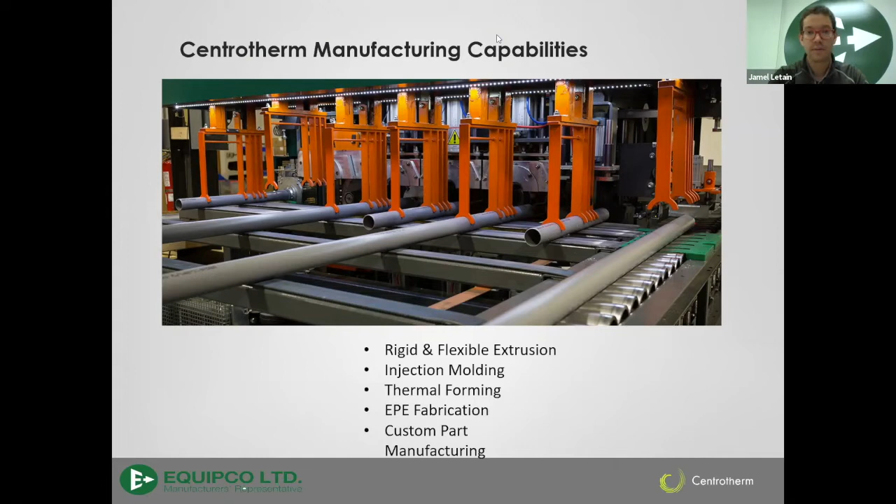So for the ULC-S636 standards, a lot of you are probably fairly familiar with this code. The class 1 is going to be for gas fired appliances that are more than 135 degrees Celsius. Your class 2 is going to be for temperatures of 135 Celsius or less. But you'll notice when you get into the class 2 that there's a few different classifications: the A, B, and the C. So for A, the maximum temperature is at 140. That's your typical PVC.

And then for your CPVC, you're going to be able to go up to 180 degrees Fahrenheit. And class 2C is polypropylene, and that's what Centrotherm is focused on, which is going to allow you to do any venting up to 230 degrees. So a lot of the CPVC business can get transferred over to polypropylene. Product's going to be lighter and more cost effective. And as you can see from the classes here, you're getting quite a bit more margin of safety in terms of the temperature.

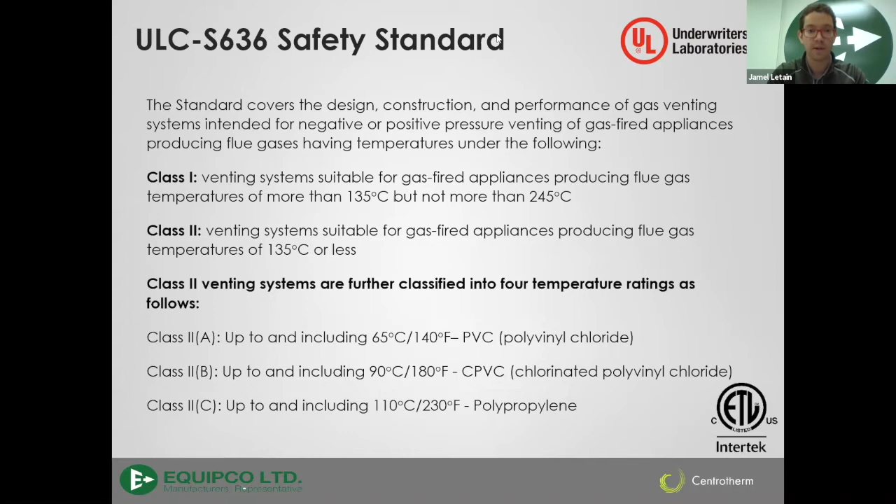So here, just a little bit more details on the ULC-S636 factors. For our InnoFlue, it's 0 clearance to combustibles, so you can attach that directly to your appliance. Some appliances you'll be able to connect direct, some you'll have to have an adapter. For your support requirements, deflection is not to exceed 1%. Vent systems must withstand 9 kilograms of impact, a 9 kilogram sandbag hitting the side of it. Is it going to be able to hold up its integrity? In terms of spacing, every 78 inches on a vertical run and every 39 inches on a horizontal installation.

It's got your flammability in terms of being resistant to flame spread. For your cold weather impact, it's also going to be able to handle minus 40 degrees Celsius. And then joint requirements is going to have the 100-pound pull test. Your connector rings are going to be required on your 2, 3, and 4 inch. These are your connector rings here. From the side, some of you might have a hard time seeing this, but there's this single tab here that'll end up linking over.

So for 2, 3, and 4 inch, you're going to need that on every single connection. On your commercial sizes that are 6 inch and above, 6 to 12 inch, it's not required, but they are available if you do want to provide that for the installation. And then for aging, you have a 180-day UV climate chamber. The InnoFlue Gray is UV certified.

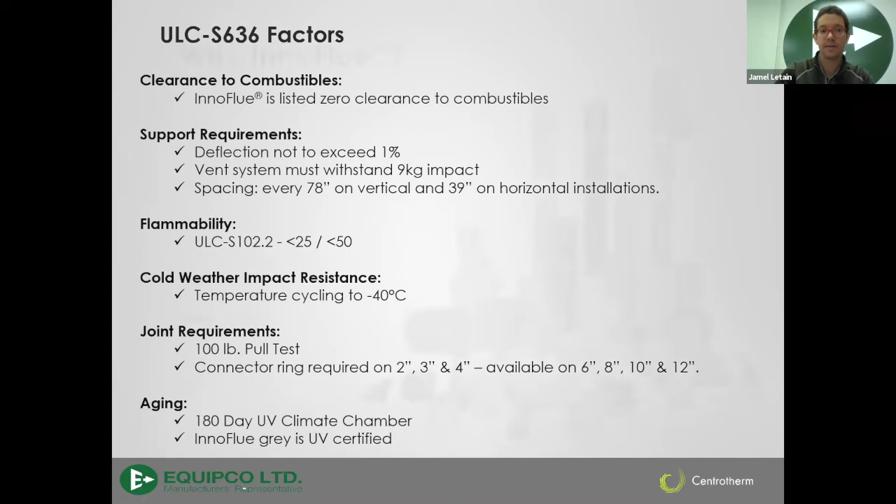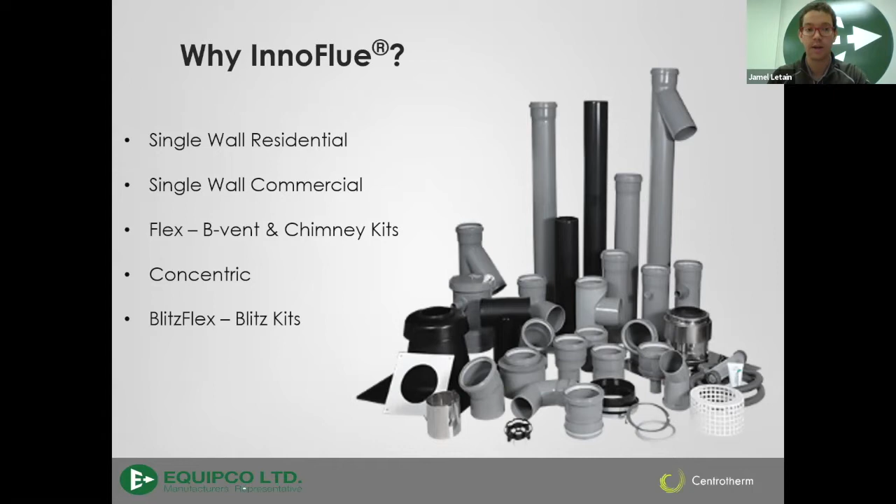So for why InnoFlue, we've got our single wall residential, we've got single wall commercial as well. And then there's also some flex B-vent and chimney kit solutions that you can use. And then they have concentric, and then we can get into the BlitzFlex as well, and Blitz kits. So first with the single wall vents, for residential there's going to be the 2, 3, and 4, and then commercial is going to be your 6 to 12 inch diameter.

And then for your section lengths, you have 1 foot lengths, 2 foot lengths, 3 foot lengths, 6 foot lengths, and then the 10-foot sections, which is really important to know with Centrotherm, because in terms of gasketed systems, it's pretty rare to come across a gasketed system that's going to allow you to have a 10-foot length. With the North American facility that Centrotherm has, that allows them to be able to provide that service to the North American market. I'm sure you can imagine how clunky it would be to travel 10-foot lengths from Europe.

And then as well, you can also cut and deburr. So if you do have a length that needs to be slightly shorter, the cut doesn't need to be as exact as it would be if you were using CPVC. You still want to keep it as flush and plumb as possible. And then most importantly, with the gasketed systems, you do need to make sure that you're removing those burrs in the field, because if any particles of the polypropylene end up getting inside of the gasket, that's going to compromise your system. That's your EPDM gasket.

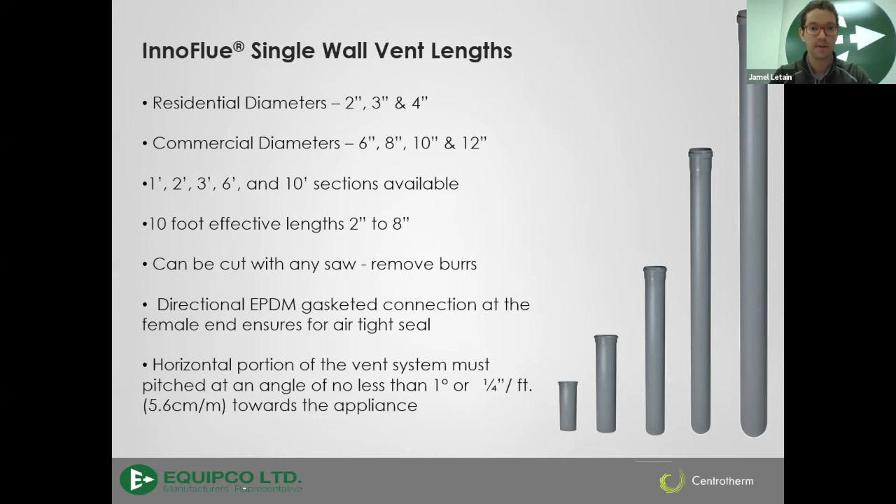Then for your horizontal portion, the pitch needs to be at an angle of no less than 1 degree or 1/4 inch per foot. Luckily, we've got some fittings to help you guys accomplish that as well. And that's what we're going to be going into here. So with our elbows, we don't actually have a 90-degree elbow. You won't be able to tell from this, but this is actually an 87-degree, meaning that the pitch is already naturally built in, which is great for the contractors in the field. Saves them a little bit of work.

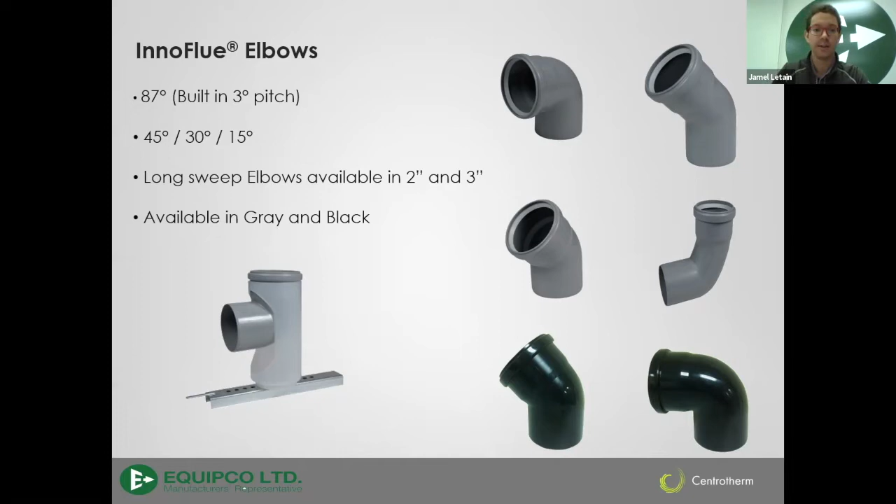And then we have 45s, 30s, and 15s as well. There's going to be long sweep elbows that are available for your 2 and 3 inch, and then available in gray and black as well. For condensate and combustion, these are a few different product options you have. The test ports are available, test caps with a drain, horizontal drain tees. We have the ball valve siphons.

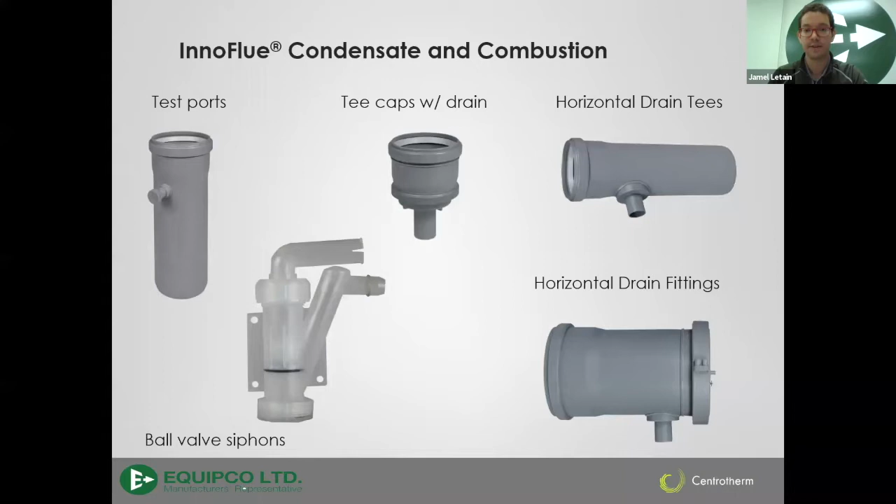If you don't have any rubber protecting the metal from the polypropylene, the chafing that could happen over time from expansion and contraction could cause your system to be compromised. So you just want to make sure that you're using a clamp that's going to have rubber. And in addition, it also needs to be a full clamp. You don't want to be using any U-clamps or whatnot. You want to make sure it's a completely closed setup.

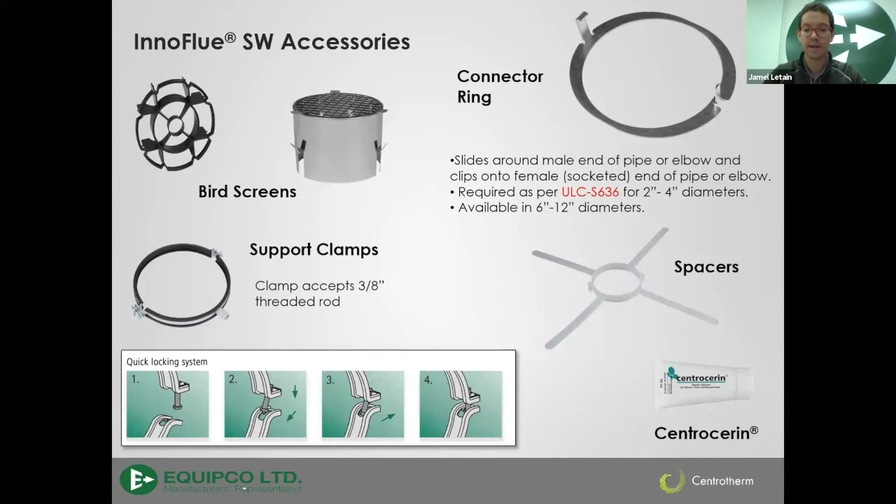And in addition, if you do need to do any adjustments before the final finishing work on the building is done, you can always spray the joints. The water will seep into the dried lubricant, and it'll reactivate and give you a little bit of playability to reset it. And then in about an hour to 2 hours, once it starts to dry out, you'll find that it's very secure again and you won't be able to move it.

Which is also a solution that you can offer as well. But in terms of trying to offer something to maybe some houses that are a little bit more luxurious, it doesn't really look too nice to have a gooseneck system. This low profile system complements the house a lot better.

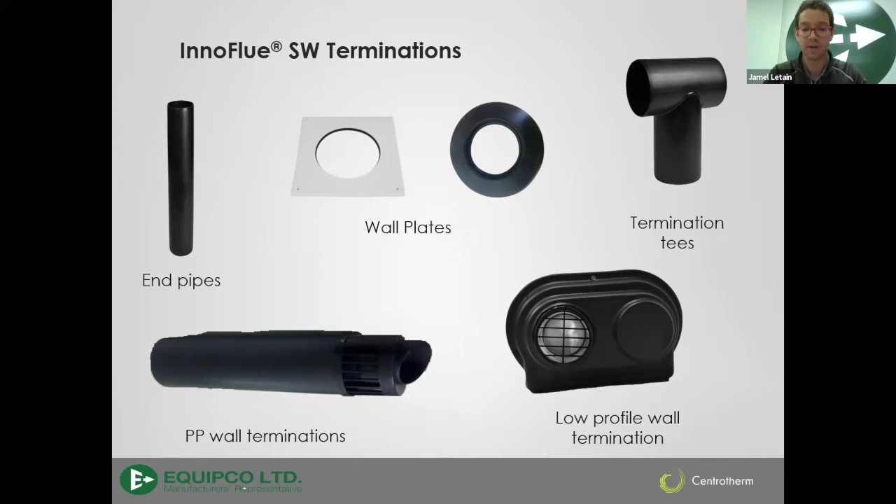In addition, you can also paint that black surface so that way it matches up closer to the aesthetics of the house. We get some positive feedback from developers from that, as the homes that they're building look a little bit more clean and a little bit more polished when you don't have as much mechanical components that are sticking out the side.

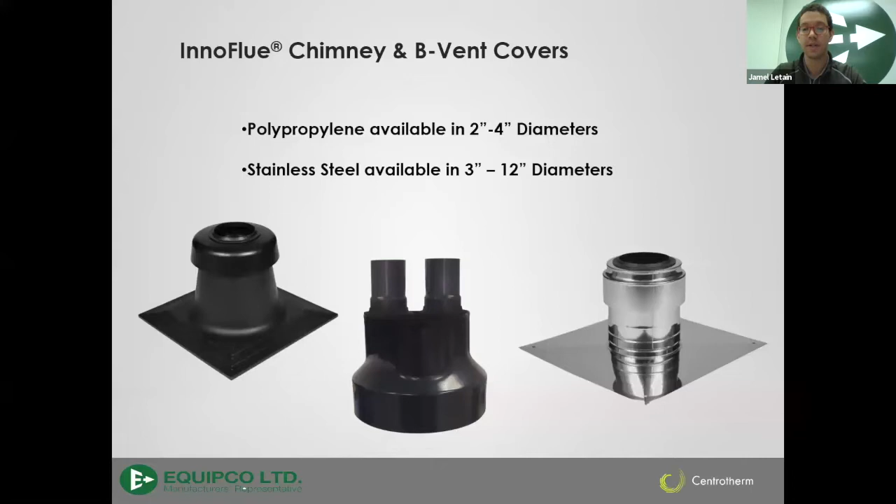So for the chimney and the B vent covers, you'll see the polypropylene is available in the 2 to 4 inch diameters, and then in 3 inch to 12 inch, there's going to be the steel or stainless steel available for you as well.

So for assembly, we'll go through one here quickly just to give you an idea of how this works. So here I just have one of the standard InnoFlue systems. You'll be able to recognize from the green here that this is the standard. So this is what you're going to use for your flue gas going up to 230. You wouldn't use this for your air intake. It's going to be the Blitz that you'll use for that. So to recognize that, this is going to be your green labeled.

Then you're going to take one of these clamps here. Then we'll also have an 87-degree elbow. I'm going to take the Centrocerin, take a small dab of it. Doesn't have to be very much. I'm just going to lightly place a layer all the way around. It doesn't have to be too much, just enough to make it glossy.

If you do apply a considerable amount of this Centrocerin, you will find after installation that there's some flakiness on the edge of the pipe, just from the excessive amount that was used. That's not an issue. The system will still work just fine. It's just that if you do have any inspectors that are on site and they notice that, they might be questioning why that residue is there. So just a good thing to keep that in mind so that you can let them know that it's likely just a little bit too much of the Centrocerin that was used.

So now that we have that lightly lubricated, we take this piece, take this piece over top like this, pull that down, place this over top, slides in fairly easily, and then you just want to take that clamp on the side and you're just going to pop it over the top. You'll have to excuse me, it's going to take me a moment here.

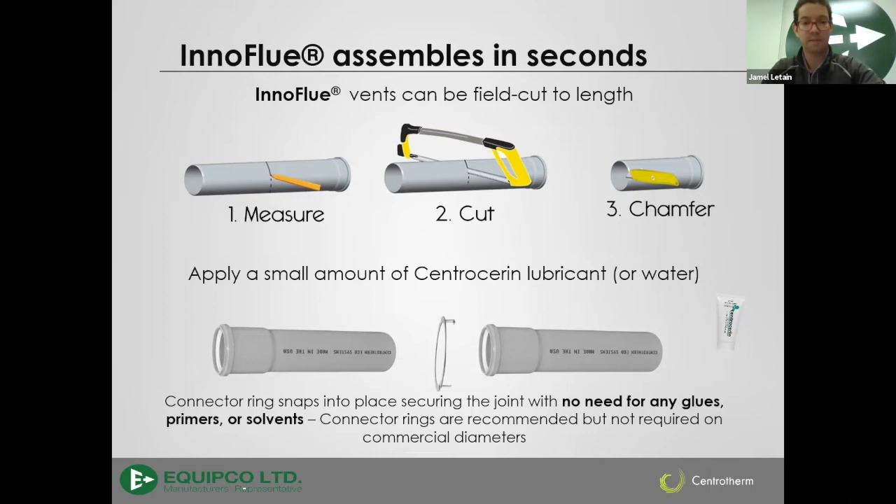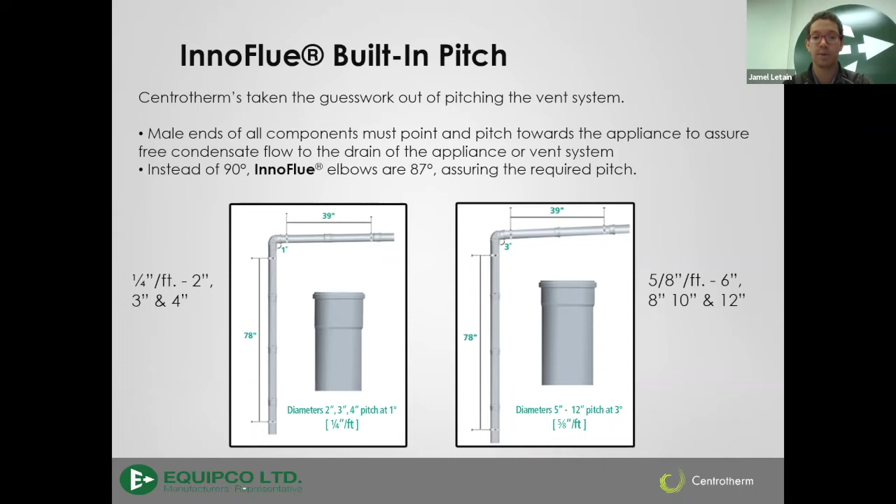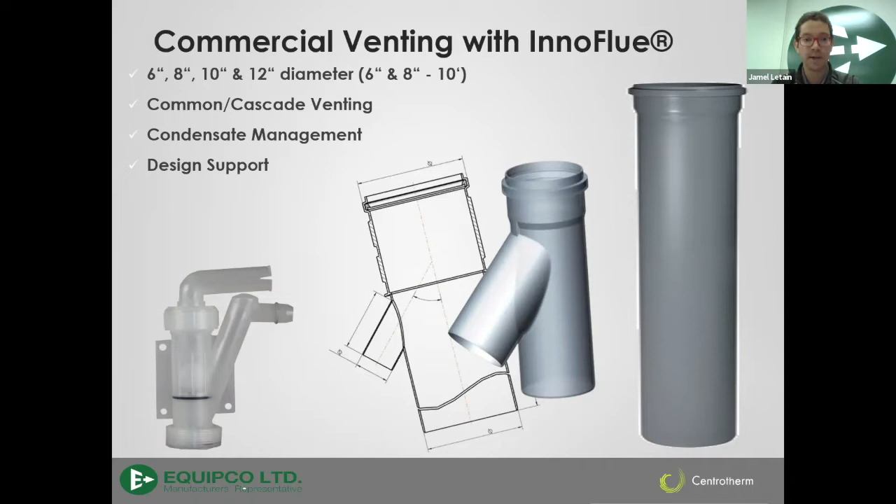For your commercial venting, that's going to be your 6-inch to your 12-inch. You can do common and cascaded venting as well, condensate management, and then there's a design support. Towards the end here, I'll provide you guys with a little bit more information on that design support, as it's a very innovative service that Centrotherm provides, and I really think it's something that people in the market should really be taking advantage of. Not only does it give you guys some backing from the customer, but it's also just a very professional document that's going to help people out.

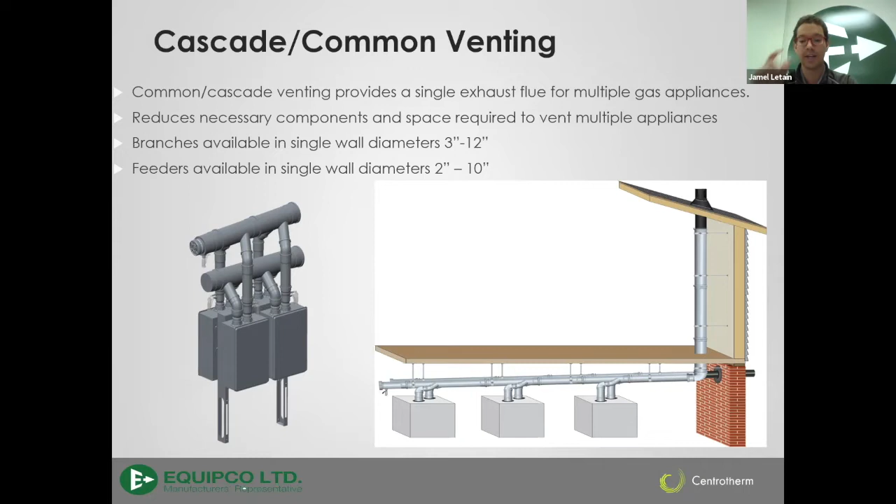Here's a nice sample or a picture here for you. You can see the siphon system on the top and them being cascaded together. Also can notice the clamps and supports that are used as well. And you can see that both of the vents are attached right to the appliance as well.

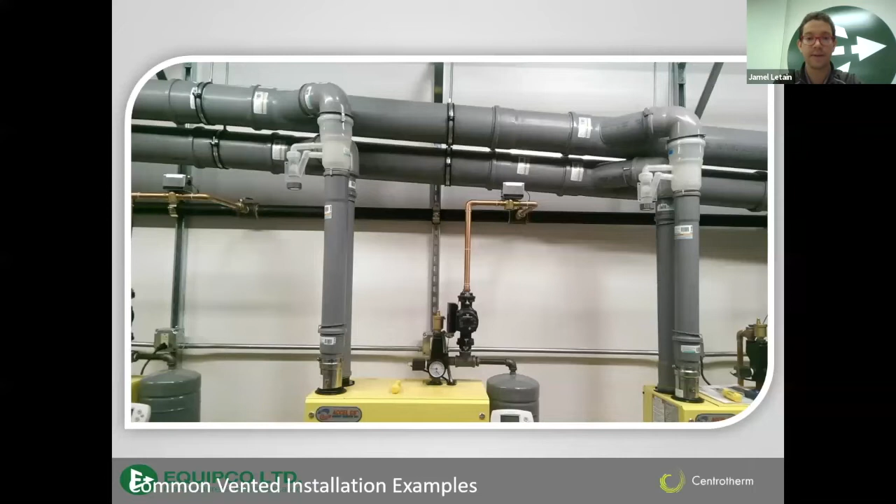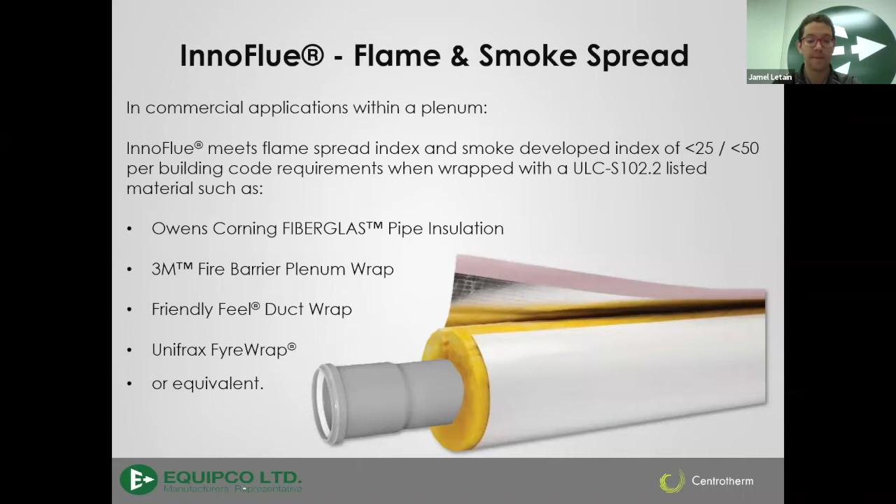So InnoFlue for flame and smoke spread in commercial applications within a plenum. InnoFlue meets flame spread index and flame development or smoke development index of less than 25 or less than 50, per building code requirements, when wrapped with a ULC S102.2 listed material, such as a few different options you have available below. And for barriers or fire barriers, single wall polypropylene vent systems can be used in areas that require 1 or 2 hour fire ratings, ULC S115, when used with a listed passive fire protection system.

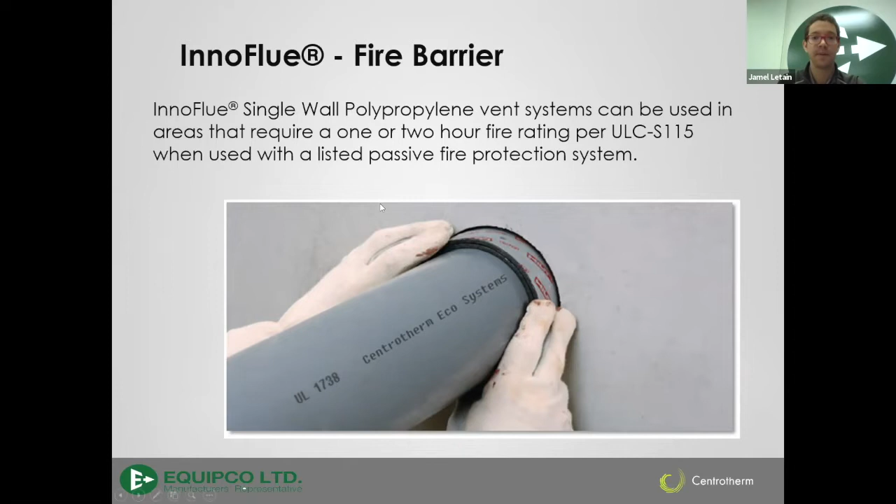Here for the InnoFlue Flex. The Flex can be offset up to 45 degrees. You can see it's a corrugated system, so you can't have it horizontal as opposed to the solid wall system that can run horizontally. This Flex is available in 2-inch, 3-inch, and 4-inch diameters. The 3 and 4-inch Flex will come with an integrated coupler, must be installed in a vertical chase, and easily connects to any fitting or vent length. It's specifically engineered for efficient installation within masonry chimneys, B-vent, and gypsum chase.

With this product, the other thing to keep in mind is installation time. Not only does InnoFlue and the entire product line save you time, but I've been given some really good feedback from a contractor here in Edmonton that speaks highly of this InnoFlue Flex. He and one other employee are capable of doing an entire venting project in a fairly short period of time. He's actually able to rent out a boom and still keep his costs lower than some of his competitors. So it's definitely worthwhile for you guys to take this InnoFlue Flex into consideration for some of your projects moving forward.

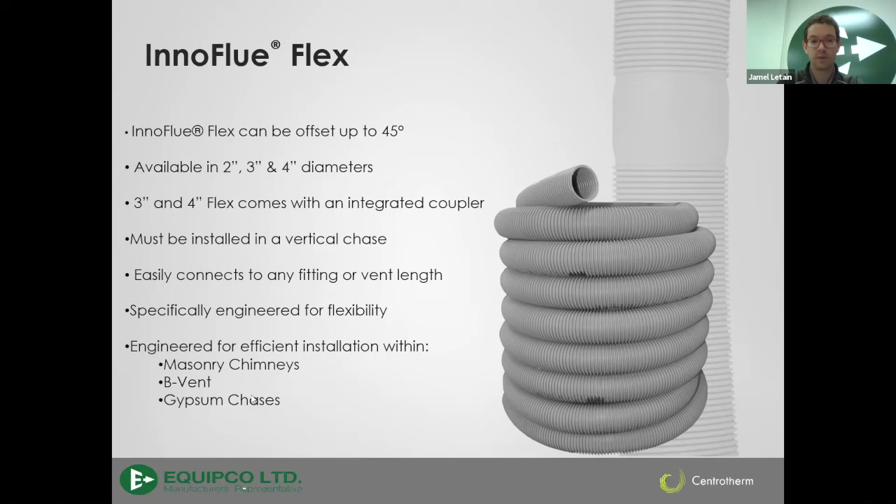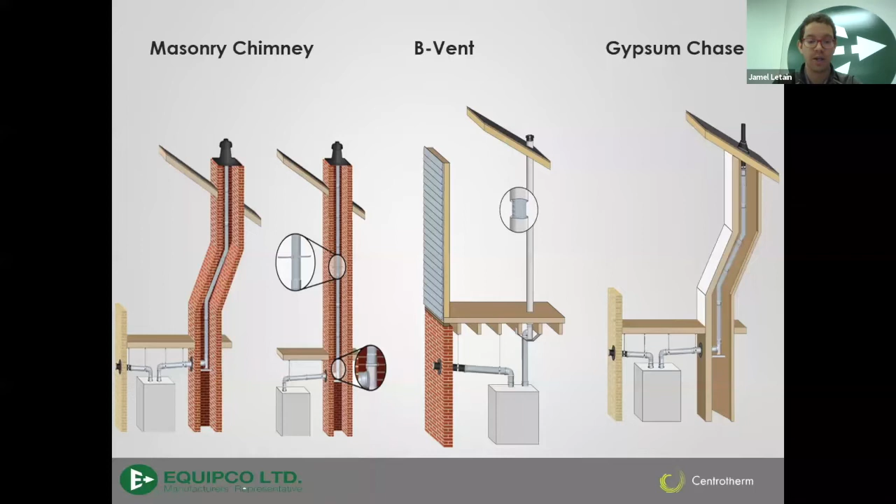Here's a few different samples or examples of the masonry chimney. You can also see the B-vent and the gypsum chase, as well as some closer views of some of the important connection points.

For the InnoFlue Flex components, they're engineered to facilitate quick and easy installation. You can see a couple of the accessory components here used to help. For the vertical run, there's the base support, that's the picture right in the dead center. It's one of the items we find is very important to make sure you use. It's very simple - you give it your horizontal line, it has an access, and you run up on your vertical line. Then there's just a 3/8 connector here, so you can use your base support, as opposed to trying to come up with a system on your own and trying to mount it. This is going to save you guys a lot of headache.

The support bracket on the bottom right, similar concept as well. Here's an example of one here. It's just got that 3/8 hole. It's going to save you guys a lot of effort. You can use either side there to screw it into whatever studs and mounting you might have in position.

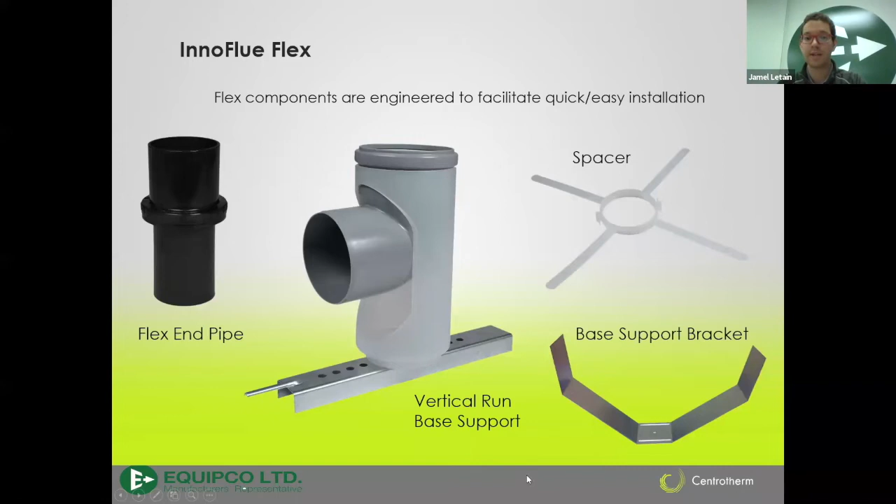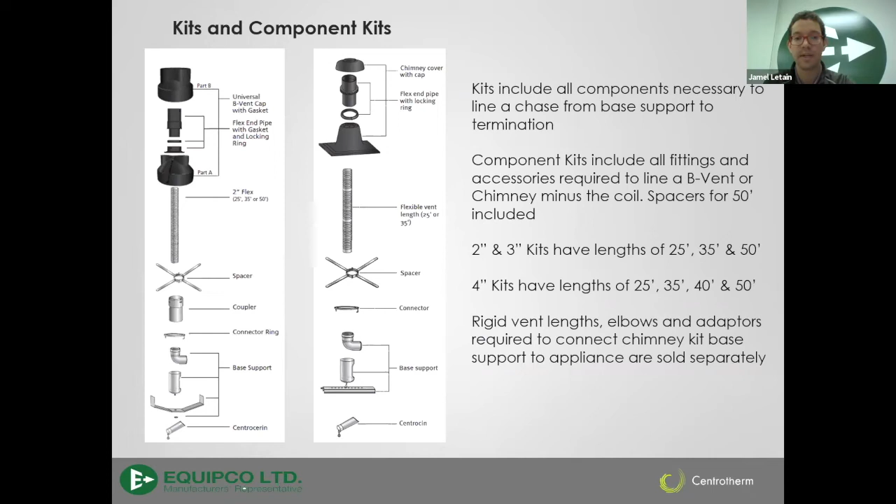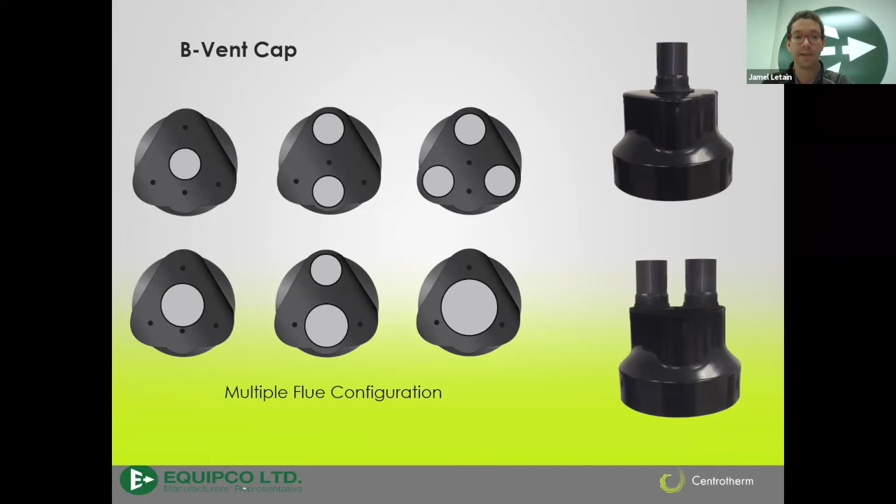So for these B-vent caps, this is a pretty interesting innovation that Centrotherm has, where you can see there's a few different options for the outlets. So when you're working on your project, or speccing it out and you've determined how you want to run your venting, you can see that all of these are based on the same mold. Not necessarily that your wholesaler is going to have every single one of these dimensions or configurations available. However, the mold is going to be the same for every single B-vent cap, and if you do reach out in advance, it doesn't take Centrotherm very much time to place these holes in and have a customized B-vent for whatever type of system you're trying to set up.

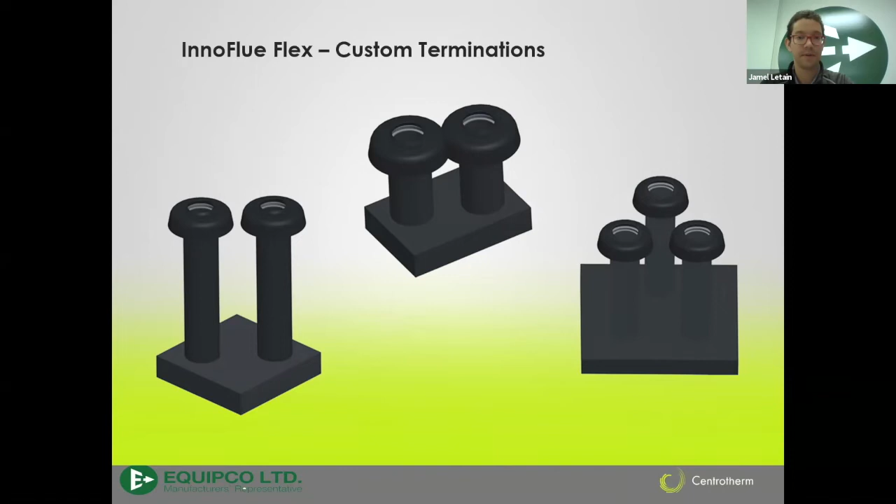Then you can see some of the custom terminations here as well. They also have the InnoFlue concentric. I don't have a sample here with me, but this is a nice, compact, resistant, aesthetically appealing option.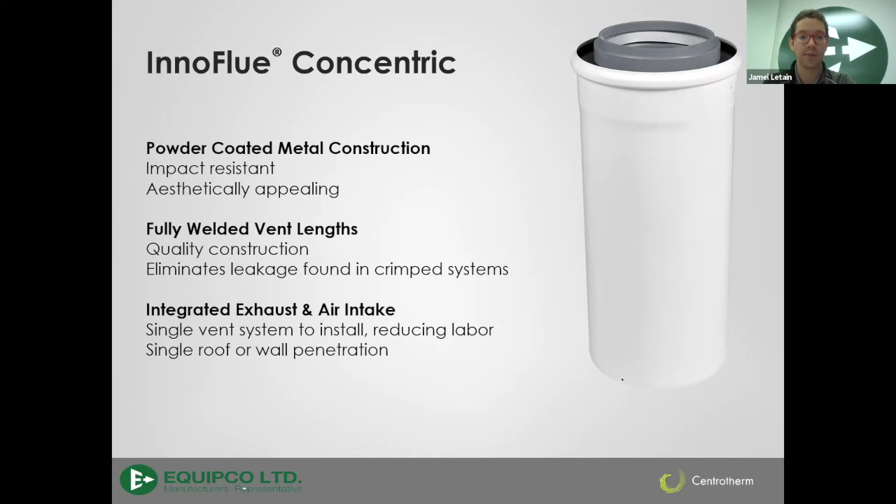You don't need to have multiple different runs. Fully welded vent lengths, quality construction, eliminates any leakage found in crimped systems. It's an integrated exhaust and air intake, so you've got a single vented system, reducing your labor because you're not going to have to do connections on two different piping systems, and you can have a single roof or wall penetration. So it's another interesting solution available for everybody in the field to save you guys some labor time and reduce the amount of

extrusions we're trying to make going in through building structures. So it's got an aluminum outer, and it's going to have a polypropylene inner, combining intake and exhaust into a single aesthetically pleasing system. You can see it comes in 2-inch and 4-inch, 3-inch and 5-inch, and 4-inch and 6-inch sizes. And here's just a couple more different fitting options available for you guys, and the terminations as well.

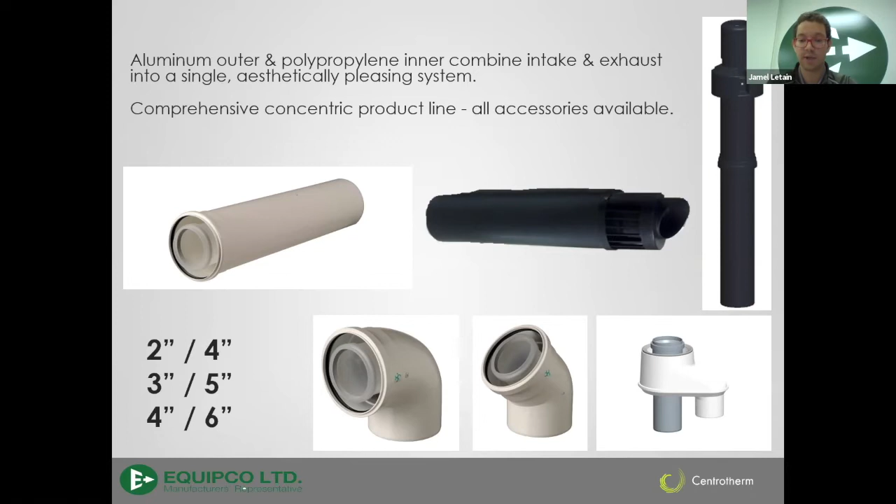For the Blitz, that's going to be the other type, they have it in solid wall and they're going to have it in flex as well. So you'll see here, as I was chatting about before, with the lime green label that we had. That lime green label tells you that you can use that on flue gas. The blue is going to be what you use on the fresh air intake. So if you see baby blue, think of fresh air.

This product here is not going to have the same temperature rating, but from a cost standpoint, it's fairly attractive, so definitely worth taking into consideration. Single SKU kits, continuous intake runs, installs in minutes. No glue, primer, or solvents necessary for the Blitz either, or any of the other InnoFlue products.

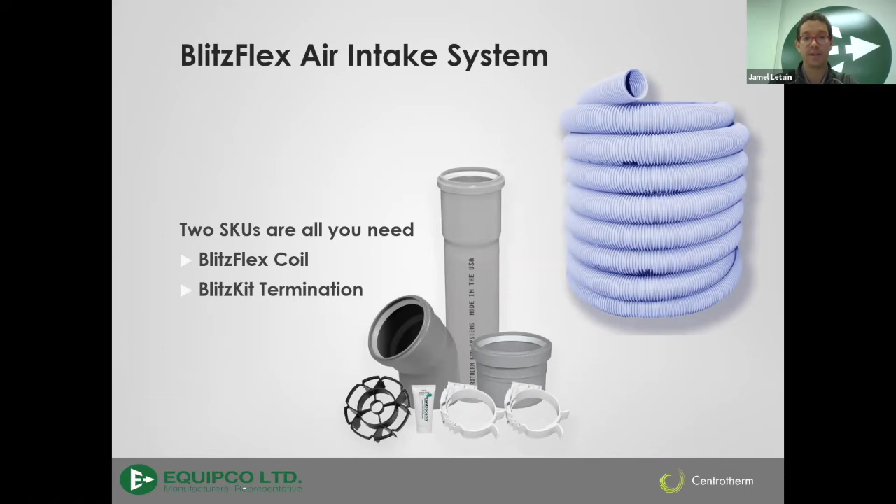So you can see there we have the flex coils that are available. There's only 2 SKUs that you really require: your BlitzFlex coil and your BlitzKit termination.

Centrotherm tech support: if you have capacity sizing for maximum efficiency, it's imperative for the vent length systems to be sized properly. If you provide Centrotherm's team of engineers with some basic information, they'd be happy to help you guys out. It doesn't have to be extremely professional - the team at Centrotherm has been very supportive of the people in the market.

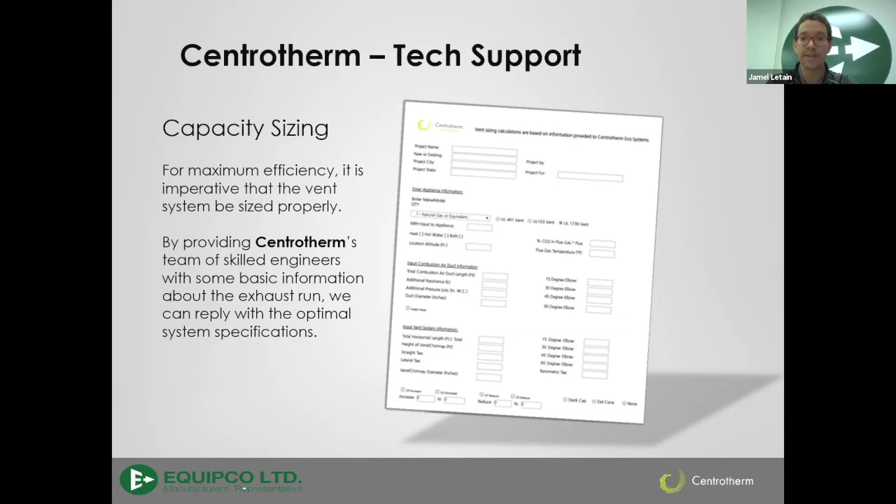If you have a piece of paper and you're able to just draw with a Sharpie or a pen, or whatever you have on hand at the site, to give yourself an idea of your horizontal runs and your vertical runs, they'll be able to help you out. Centrotherm aims to get any venting and design services back to you guys in 48 hours or less.

So here's an example of the Centrotherm design layout. You can see on the left side, there's just a simple sketch of what they're trying to accomplish. And on the right side, there's a little bit more information on what Centrotherm's VentBOM is going to provide for the customer.

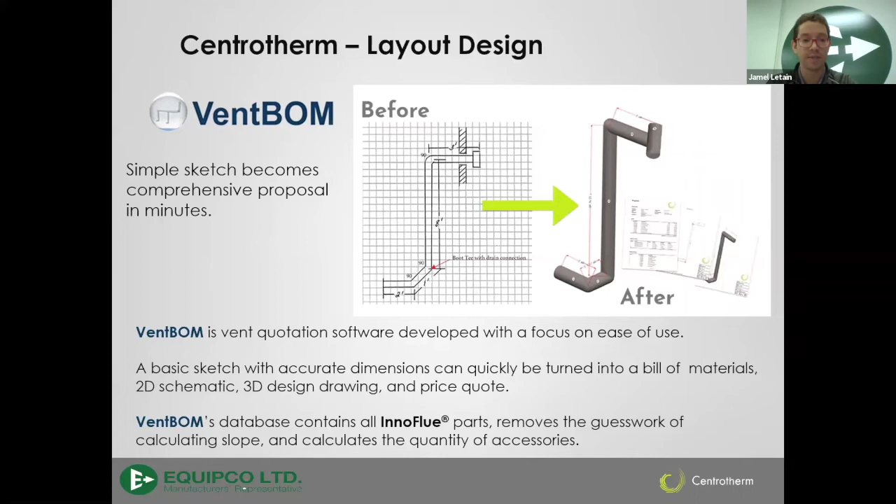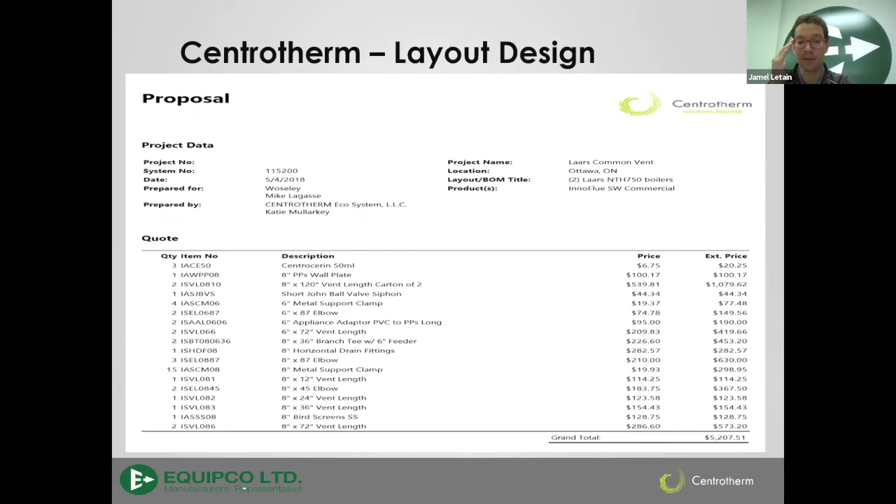So then you have your layout design. You can see here, for the wholesalers as well, this is a really attractive feature that Centrotherm offers. If the product's not currently in stock and it needs to be special ordered, Centrotherm is essentially going to provide the wholesaler with a product list and their price. So it's going to be a lot easier for them to upload all this information for any commercial projects on components that are not typically going to be stocked at the branch. It's just trying to help out the wholesalers, offering something on their end that'll save them time and hopefully help out the customer as well.

Then on this portion of the layout, I find it's really helpful for the people in the field. You can see that it has the entire system design, and it's also telling you which components you're going to need and where. So if you have somebody who's perhaps not as experienced in the field, you can essentially provide them with a copy of this as the supervisor on site and let them know that this is what you want installed.

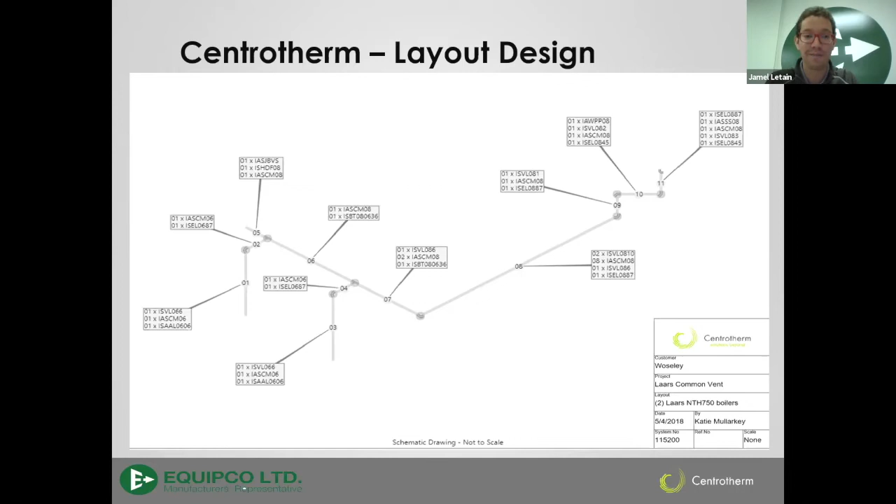They'll be able to know exactly what parts to install, since every single Centrotherm product fitting has the SKU labeled on the barcode. It's not quite dummy proof, but I'd say they're doing quite a bit to make sure everybody has support, so you don't have to do any more work than necessary.

And once again here, this is the same design layout, and they're showing it in order of installation. So very helpful for the guys in the field, and the description of the product as well, since some of the SKUs can be a little hard to decipher.

This is a very useful resource for you as well. You can see on the top there, Evan has provided the link for the Centrotherm site. I'd encourage you to use that link whenever you're trying to find out what appliances it can be used on. Centrotherm is constantly updating this site, so one month an appliance you might favor may not be on there, and three months later they may very well have the approval.

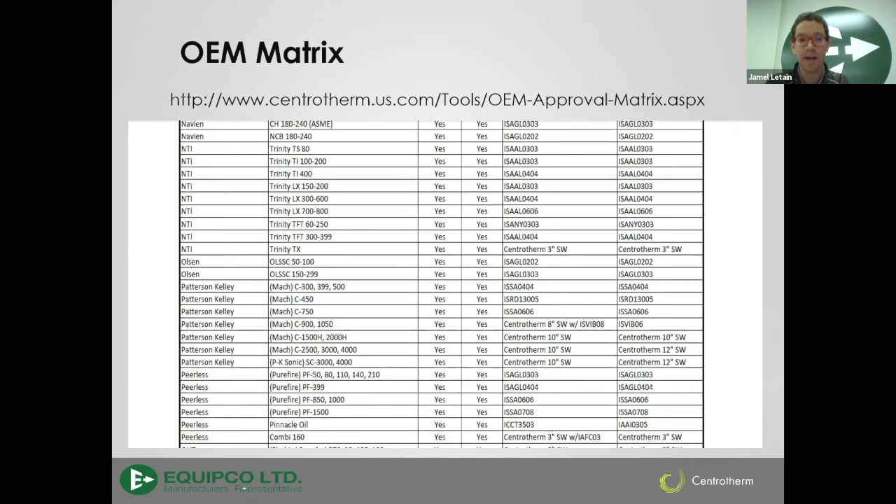And if you have a certain appliance you like working with that you don't notice on here, feel free to reach out to myself or any of my colleagues, and we'd be happy to dive into that for you and see if there's a solution we can provide.

All right, so we've got the test here, but I'll just pop out and see if we've got any questions that I've missed.

And I see no outstanding questions there. So what I'll do is start up with the Centrotherm quiz. If you've had a chance to go through it, feel free to answer any questions, and I'll try to go through it at a pace so that everybody has a chance to answer any questions they might have during the process.

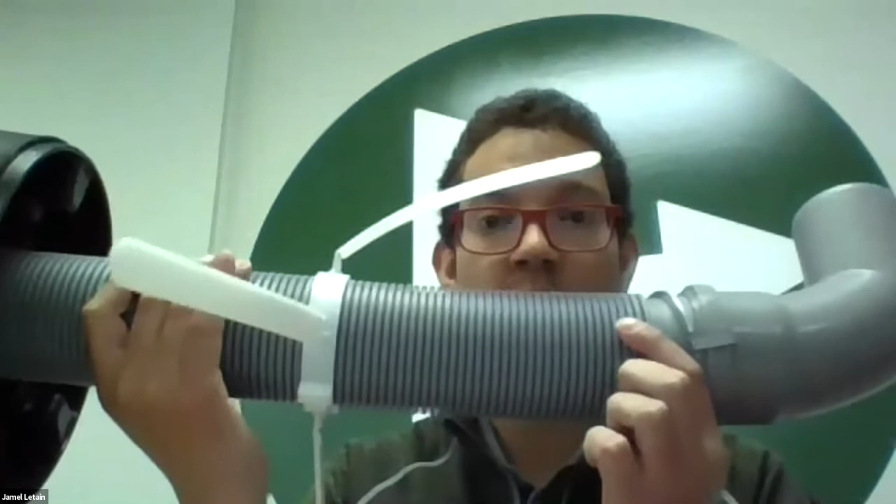So this one here, it's going to be a no. This one tricked me the first couple times I did it as well. This is referring to the InnoFlue Flex, the corrugated product, this product here. With those ribs, you don't want to have any condensate happening, so that's why it always has to be at a 45-degree angle or straight up. So for number 9, the answer is going to be no. InnoFlue Flex cannot be used for running horizontal runs.

So for number 10 here, for the connector rings: are they required on residential 2 to 5 inch? True or false?

Glenn and Brian, both with true. Appreciate your guys' feedback, that is correct. So those connector rings are necessary for the residential diameters, that's going to be your 2-inch to 5-inch diameter. If you do the commercial sizes, it's not required. But if you do like to have that connector ring, they are available. A lot of that is going to be at the discretion of your regional inspectors, so just know that if your inspectors decide that they want that in whatever market you're in, we do have them available for you as well. The code only requires you to have them on 2 to 5 inch.

I believe someone here is asking for some feedback on number 3. So for number 3, that'll be all of the above there. If anybody else has missed any of the answers, feel free to put them in the box, we'll make sure you guys get that feedback. We want to make sure that you guys have all of the accurate information.